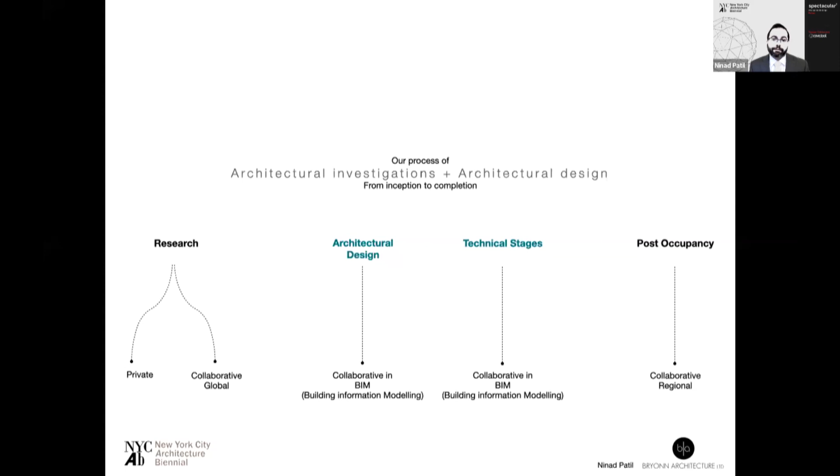We will also look at 4 examples of our own projects where collaborative research influenced our design process in various sectors.

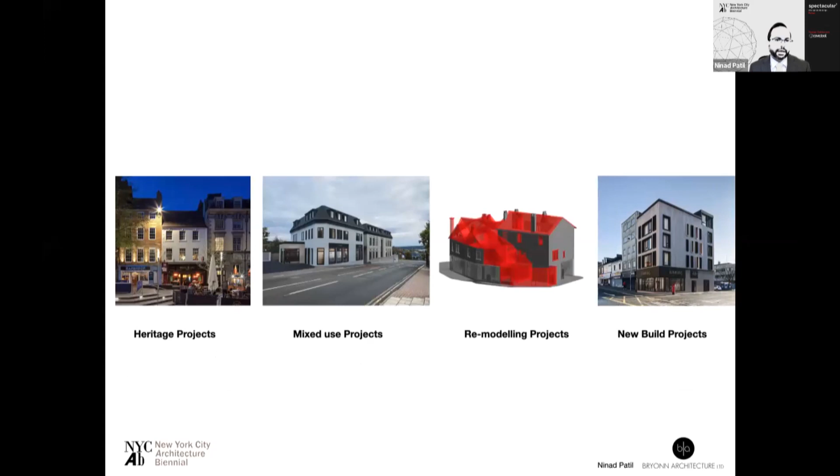Now, as you all know, research is a very broad subject in the built environment because it can vary largely due to different objectives. For example, research conducted for socio-economic aspects will vary largely from research conducted for a product or a technology, such as a BIM software or a new construction material.

This aspect of various specializations in micro sectors within the built environment facilitates the collection of specialist data. The outcome of interdependent and multidisciplinary research is that more and more specialist information is pooling into the data system, and it becomes highly beneficial to integrate it with design stages.

Now, why global collaborative research and design in architecture? It can positively influence critical decisions of stakeholders or local authorities. It improves the process of feasibility studies and provides organized data. It improves contextual analysis during early stages, particularly related to urban studies,

and improves the strategic aspects of a design. It improves the process of design in advanced stages, such as the technical stages, and improves post-occupancy studies.

And how can collaborative investigations have a positive impact on the architectural process as such? For investigations to have a positive impact on the actual architectural process, it needs to have a significantly effective framework, needs to be precise in intention and content, needs to have application that can be identified or measured, needs to be mutually beneficial for global participants, needs to be recent and coming from verified sources, and most importantly, it needs to have contents that can be archived and shared in a certain format.

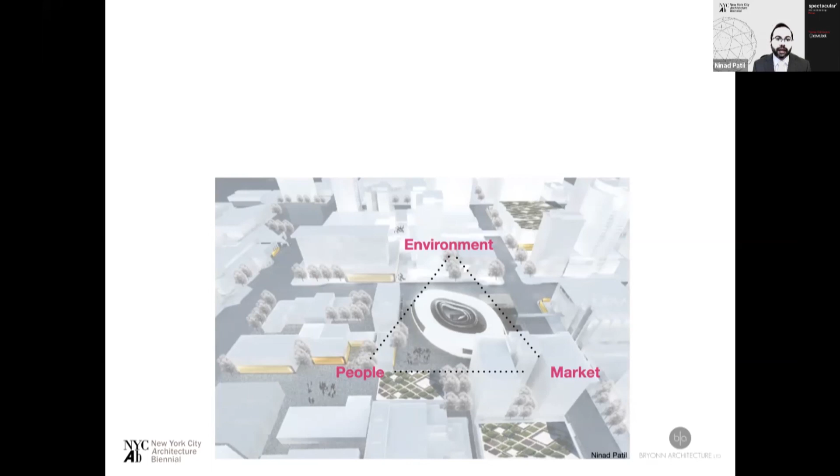So this is an example where global collaboration can significantly influence the modern application in real time.

Now let's take a look at an example where our ongoing research in adaptive reuse helped us carry out successful schemes. This is one stretch of Newcastle's central conservation area where we have been continuously involved with some Grade II listed buildings for the last 7 years.

Much of this area has undergone regeneration via government initiatives on a wider scale. However, we were fortunate to be involved with various private projects to create successful adaptive reuse schemes.

So these are a few examples where the major part of the buildings were left with no viable use, or the historic fabric was deteriorating. There is a high degree of sensitivity involved in such projects, and the proposals need to be based on a wider understanding of the issues.

Also, our continuous research in circularity helped us gather key information in a relatively short span in an organized manner, which is relevant for conservation area projects.

So let's move on to the second segment, which is continuous improvement in RDM, research data management practices.

Now, we feel that a lot of emphasis needs to be put on research data management practices as we continue to expand our global collaboration and partnership models in research and design.

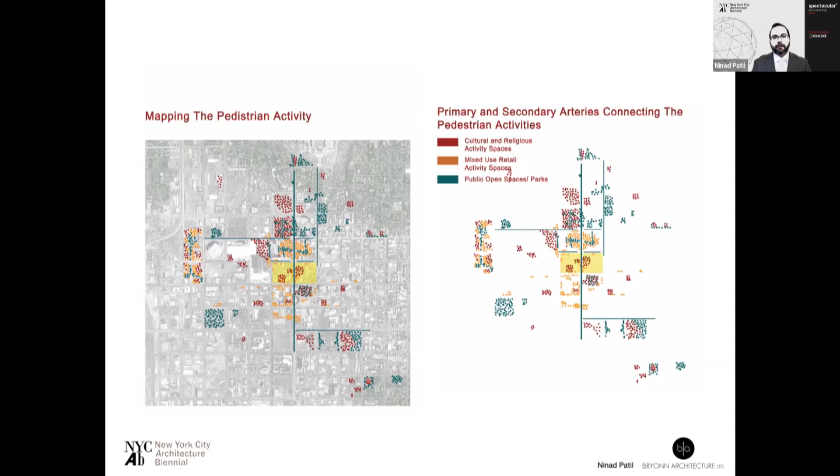This particular project involves both aspects of circularity: recycling and repurposing. To come up with a sound project brief, it required appropriate collection and allocation of research data. The data collection procedures played a very vital role in maintaining an efficient way of collecting and applying data at the initial stages of design.

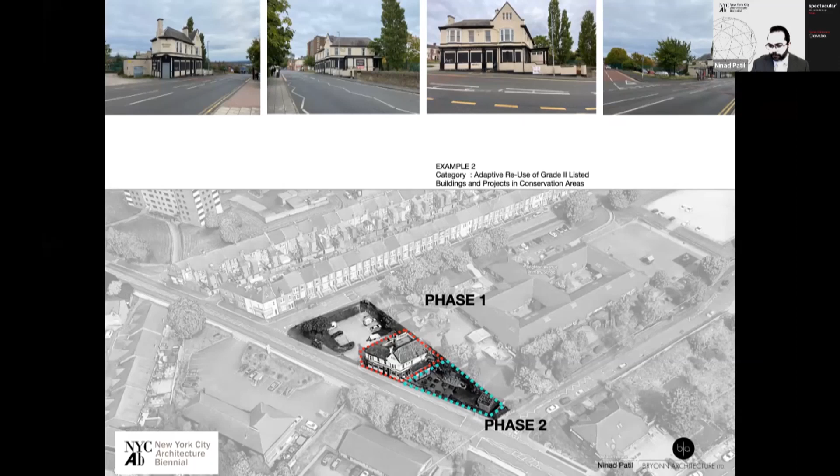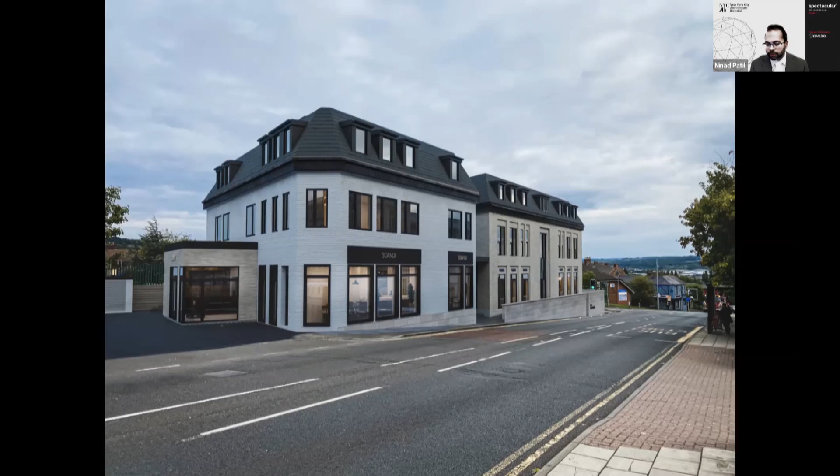This is the final product, where the old building is recycled using 60% of its components and the new building forms a continuation. Phase 1 is the white building that you see with the recycled components, and next to it is phase 2, which is totally new construction. That's a view from a different angle.

So how did segment one help us in this project in terms of circularity and urban design? The most important fact about the existing pub building was that the building itself had not failed in any manner - the use of the building had failed or got discontinued. The influencing factors for the failure of the original use of a building or land are usually far beyond the immediate context. They could be nationwide policy changes, socio-economic changes, demographics, transport, and countless other urban factors.

After identifying the influencing factors, we could engage with our participants in the ecosystem to collect and organize data to cover various categories of our data collection procedures. The mediums were already known and established. The documentation was done as per a system that provided maximum clarity at design stages.

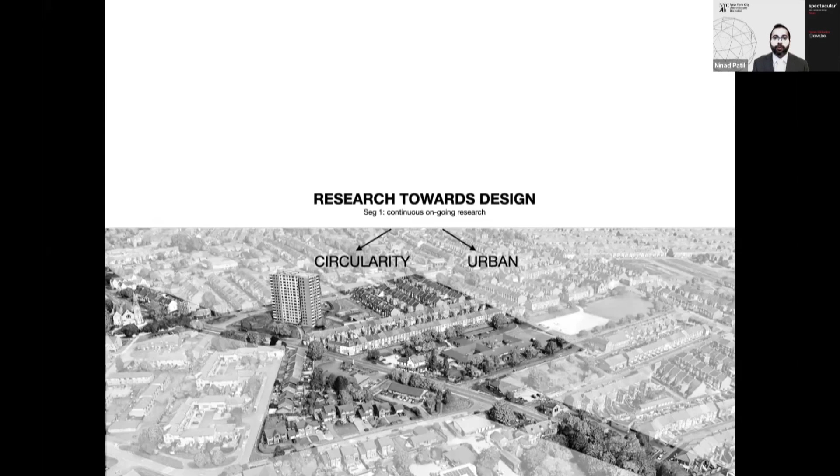This is also a very important aspect of adaptive reuse, where a building or land fails to come back to life through natural progression of time. That is when it may require a more scientific approach towards investigating before designing, to ensure the new use can have a lasting and positive impact on the building and the wider context.

So this is an example of how segment 2 was beneficial in this project. This is how data pools into a system from various sources. The zone under consideration is split into smaller parts for investigation, and information from various sources is categorized in a certain way. It then gets allocated into a certain part of our database with sharing preferences.

Now, the data is extremely helpful in establishing various findings towards feasibility analysis of a proposal before we start designing. This also ensures that the design intervention can have a wider positive impact.

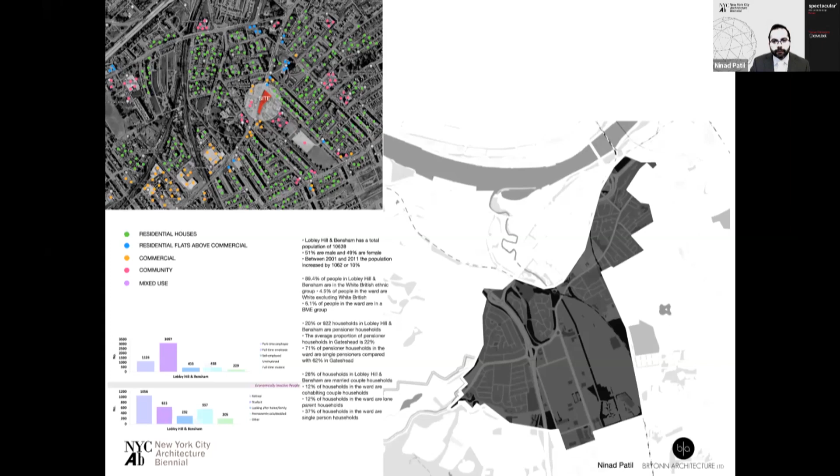Let's move on to the third segment, which is cultivating research partnerships and defining global partnership models. As we all expand our interactions globally, the importance of having a sound research ecosystem and effective partnerships has been increasing for most types of multidisciplinary research.

In today's time, we rely more on specialist information exchanges. We find that an effective combination of sound research ecosystem and research data management practices is highly essential for research outcomes to be relevant in the wider context, not just the project alone. We feel cultivating the research ecosystem is very essential in the long run - it establishes trust and confidence among various participants, because of which a program can actually go to the finish line.

Now, why do we need collaboration and partnership models? Over the years, the definition of collaboration in research and design has become more pronounced, because the need for understanding the complexities in the built environment has significantly increased. The definitions and relationships in collaborative research now encompass a much wider scope and responsibility - from task specific collaboration to a fully functioning partnership.

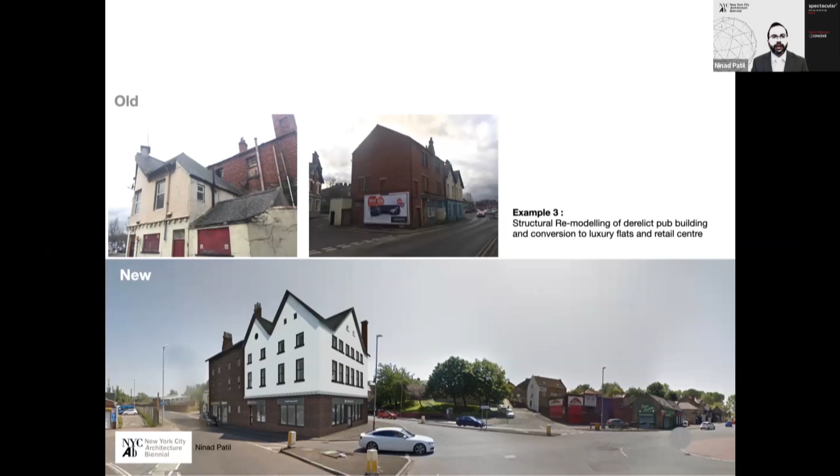For example, we'll quickly take a look at design generated for the performance category. This was an old pub building in derelict state. We generated data that was not only applied to the analytical model, but it also formed the basis of the entire design development, as more and more data was being added to the BIM model. Now in performance category, we have a lot of technical data that is assembled to generate speculative performance of a building at very initial stages.

We have 4 upgrade categories, A, B, C, and D, and that carry a set of technical information that is applied to analytical models. This helps us take evidence-based decisions at feasibility stages that otherwise are only possible at advanced technical stages. Now in this project, it was upgrade category A.

So the data was very useful in the analysis of construction components, phase plans, supply chains, manufacturers' literature, and a whole lot of other elements associated with assigning a new function to a building. The advanced stages of this analysis helped us evaluate elements such as percentage reduction in construction activities, such as plant equipment and deliveries. In a sense, the efficient research data allocation can enable conclusive analytical models.

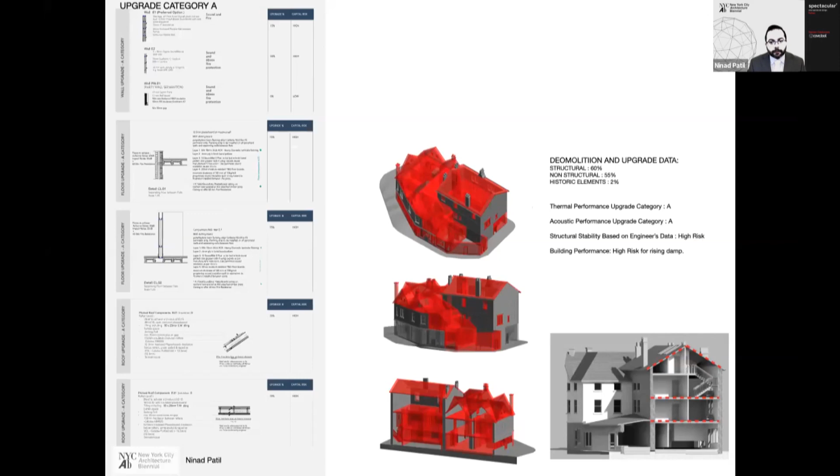So we're nearing the end of the presentation now. This is another example where various segments of our research influence the entire design outcome. So all 3 categories we discussed earlier played a major role in applying research data at initial stages as well as the final design stages.

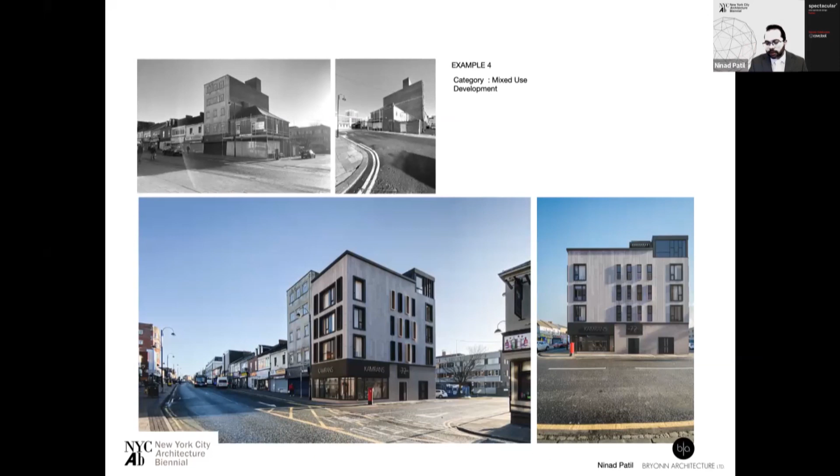So this was the overview of how our projects benefit from collaborative inputs at research and design stages combined. We personally see the benefits on a day-to-day basis. An architectural process is usually a complex process involving various specialist companies, supply chains, environmental consultants, and local authorities that engage in joint decision making. However, this process gives you various opportunities from time to time to take certain key decisions that significantly shape the outcome of the project and its impact on the surrounding.

So this is where research combined with design in an age of global connectivity can enable you to take more informed decisions for the future of the built environment at whatever scale you're practicing. Because we personally see it as a future-proofing exercise through various mediums such as sustainability, circularity, and urban studies. The collaborative decisions we take for our urban environments today have a lasting impact on social, economic, and psychological well-being, if we were to see a city as an organism or a life form.

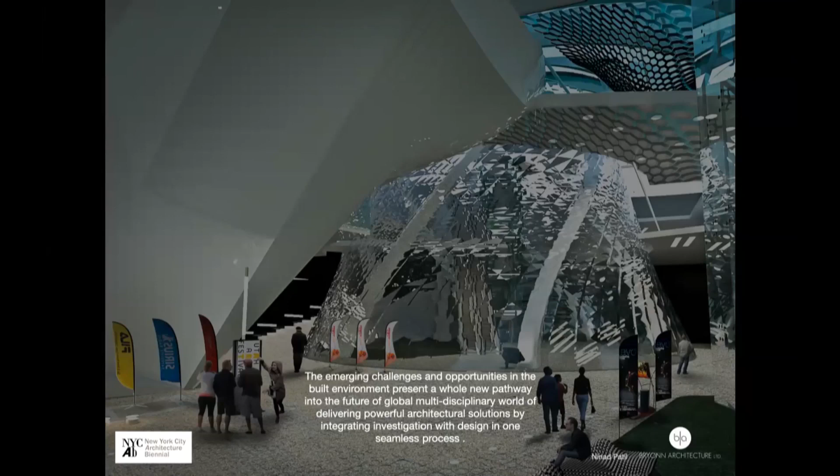So I know that Teresa is around. She's going to ask some questions from the public if there is any, or other questions we have. Good afternoon, we have some questions. Did you hear me? Oh yeah, I can hear you, but we cannot see you. Okay, I'm trying to fix my video and start my video. Okay. Good afternoon. Good afternoon. How are you? Good, thank you. Thank you for the presentation.

One of the questions is about the percentage of your fee that you allocate between design and research. What's the percentage of your fee? It's a very good question, and I wish I had a clear mechanism to allocate a certain percentage, but unfortunately, that never could happen.

So it just depends on the kind of research we are taking on. Sometimes it is for a particular project, or sometimes we continue to do some sort of continuous research in the subjects that we're passionate about.

So there's no... talk about it with your clients and investors. Did you talk to them about that? That's one of the questions.

No, the research that we carry out is completely self-funded. We don't charge for our research. It's the same as how you would carry out a broader urban study if you were to do an urban design project. The difference is that we do it on a continuous basis with an intention to apply the data in our design models.

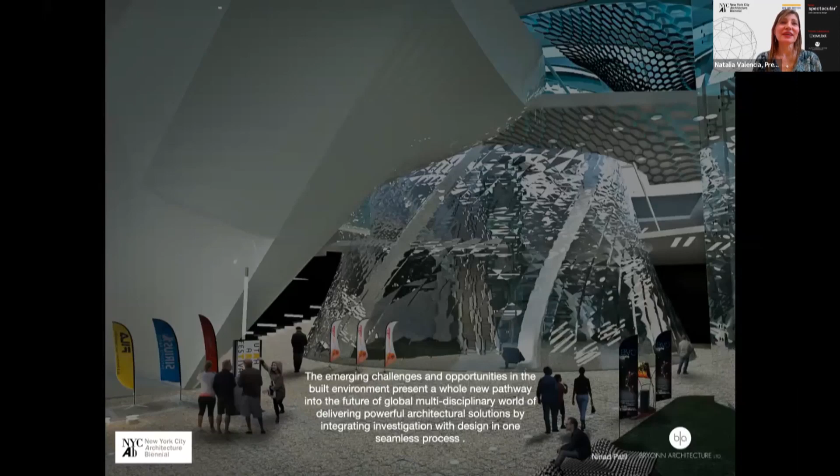Thank you. Hi, Natalia. Hi, Priyanka. Can you not hear me? Yes, we can hear you, but we cannot see you. Okay, so finally I have this sorted out.

I'm sorry everyone for the glitch, but before Ninad goes away, I wanted to thank him for this wonderful and informative presentation. I didn't get a chance to introduce him properly, but I want to congratulate him because he was recently featured in Business Today magazine for milestone achievements in architecture, completing a record number of projects in the UK across 6 sectors. That's a really great achievement in this span of time since you started in 2014 — in just a few years you've achieved so much.